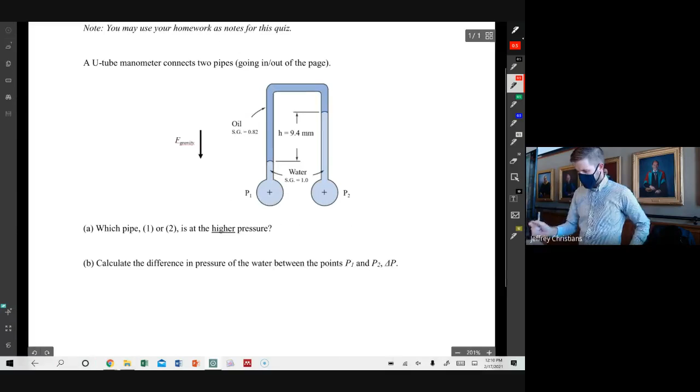Just to go over that briefly, how to think about this: remember you're choosing for part A, which is at higher pressure. I think this will help you think through the problem. It feels a little weird because the thing is upside down, but you can think about it the same way - like which is pushing harder, just visually? Well, it's the one that's winning, it's pushing its side higher than the other side. So the higher pressure is going to be at 2, because it's winning the battle, it must be pushing harder.

The difference in pressure - you're going to find a spot at the same elevation, so we'll call that A and A prime. Here, PA equals PA prime. You can't do that same thing down here, you have B prime and B, so PB is not equal to PB prime, and those don't equal each other because there's a different fluid in the middle. So it has to be the same elevation, but it has to be a continuous stretch of fluid. So that's maybe a thing to know.

So we need continuous fluid and same height, or same elevation.

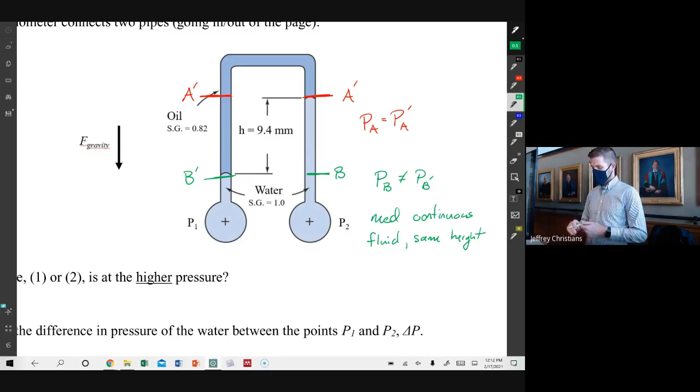And then what you're going to do is say, okay, if we look at the pressure at PA and the pressure at PA prime, you can write out an equation for exactly what that's going to be, and then set those two equations equal to each other and solve for the unknown.

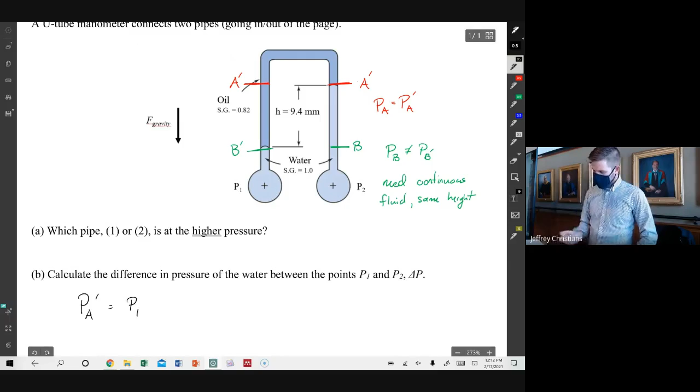So what you're going to have for PA prime, that equals P1. Then we're going up, we'll call this distance H2, we're going up a little bit from that. So we go minus rho water G H2, minus rho oil G H. So again, we're starting at A prime, and because we're going up in the fluid, it's going to be minus.

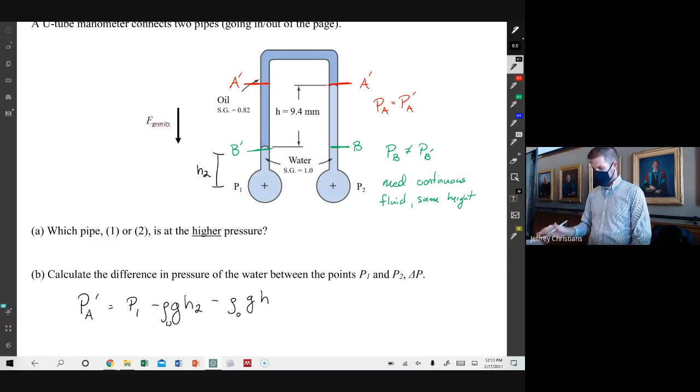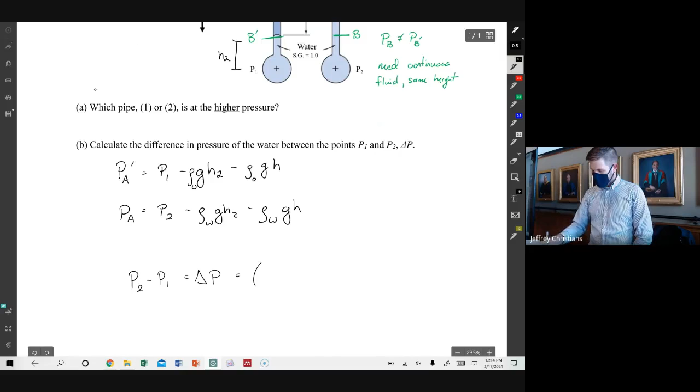We do the same thing: PA would be P2 minus rho water G H2 minus rho water G H. Then we would set those things equal to each other, cancel stuff out, and what we would get is P2 minus P1, or delta P, equals the difference in densities - rho water minus rho oil - times G H, because those two would cancel each other out. So you would just get that difference in densities.

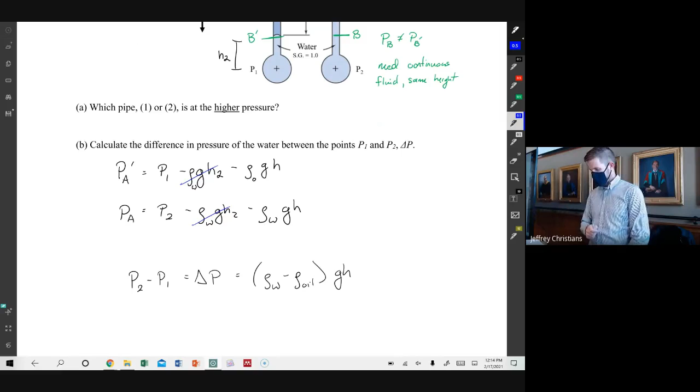And maybe that works again, if you think of the analogy of the scale. The P1 on the left is holding up the exact same thing as the right side, but it's holding up 9.4 millimeters of oil on the scale. And P2 on the right has 9.4 millimeters of water on the scale. Water is a little heavier than oil, so the extra pressure is how much heavier that water is than the oil.

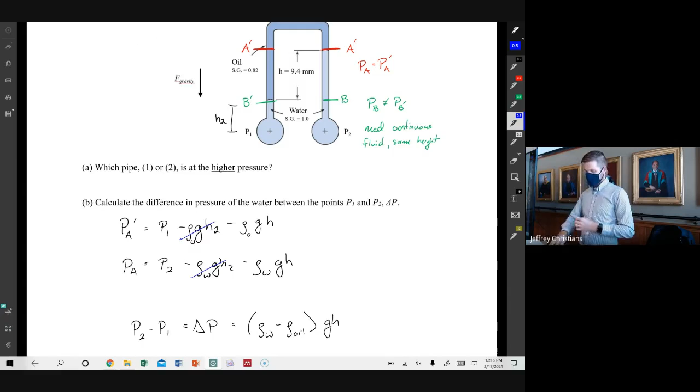So the answer was, it takes a little bit to get the units, but this was like 16, maybe 16.6 pascals, which is 16.6 newtons per meter squared.

Okay, so you first need to find the spots where you know the pressure is equal, and then say, on each of those scales, what's the actual weight sitting on those scales. Set those two equal together, and then actually go through and solve for your unknown. Especially when the geometry gets weird, don't skip steps and just jump to what the answer is going to be. It helps for you to think through it logically, step by step.

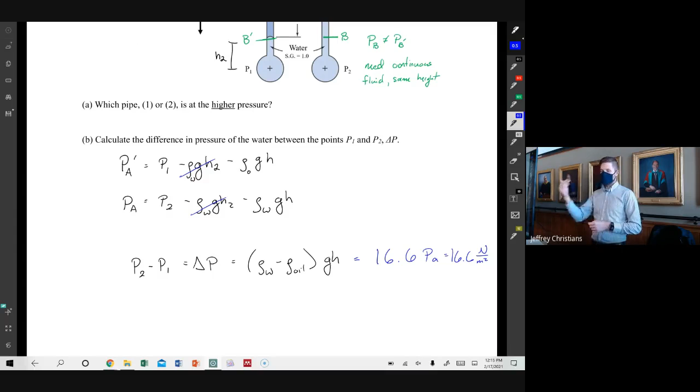Any questions on quiz?

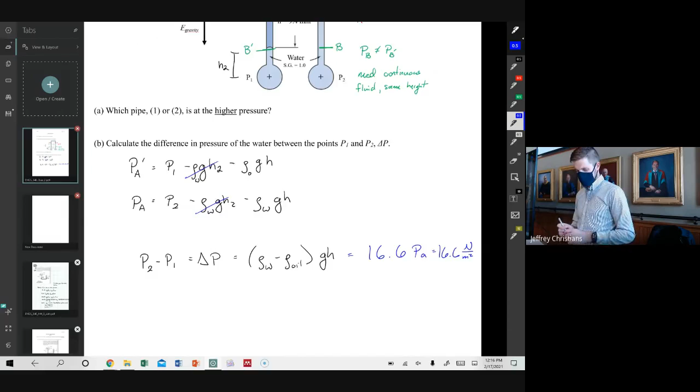Are there questions on the homework? I know that there are. So what questions are there on the homework? Yeah, Liz. For just in general for 3 and 4, I need some help with finding the resultant force. It's like the integral thing.

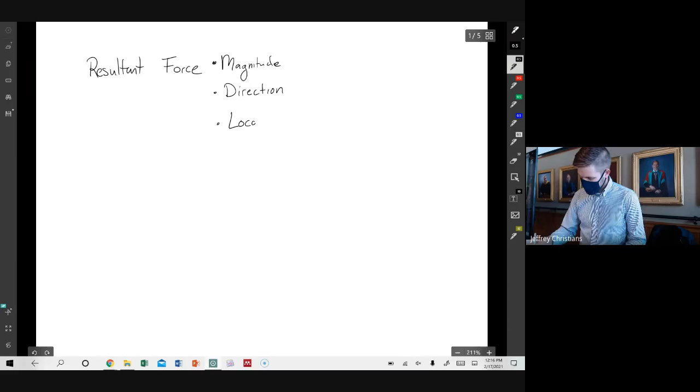Okay, so a resultant force, the equation that we have for resultant force—we have two parts, one is the magnitude. Three parts, I guess: magnitude, direction, and location. If you want to figure out what the resultant force is, you need these three things. Each of them has a separate strategy to get it.

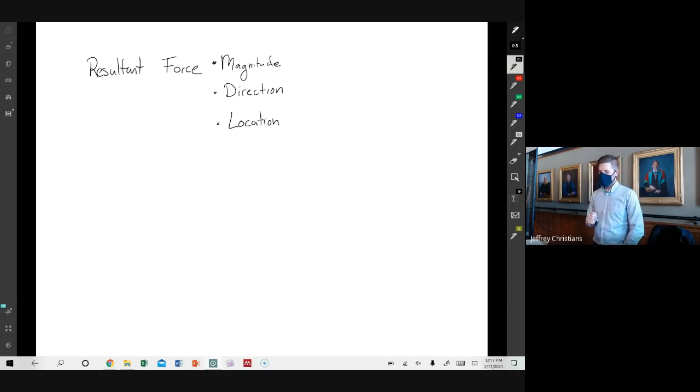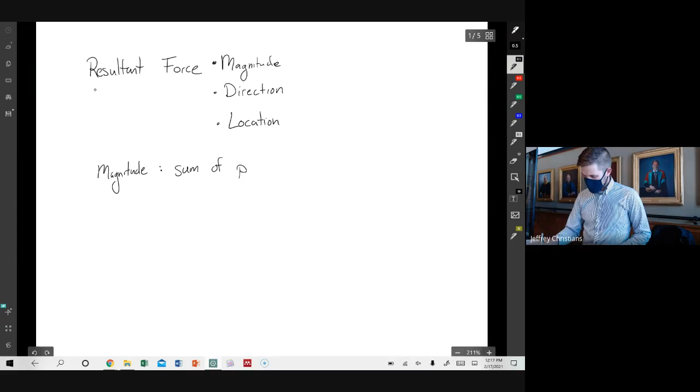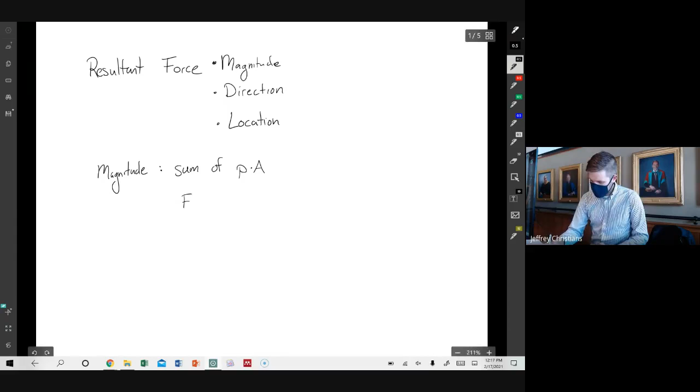The magnitude, right, that is the sum of the pressure times the area. That would be the magnitude. It's the pressure summed up over the area. So what does that look like? It would be something like this. And this is the integral you're talking about, right, Liz?

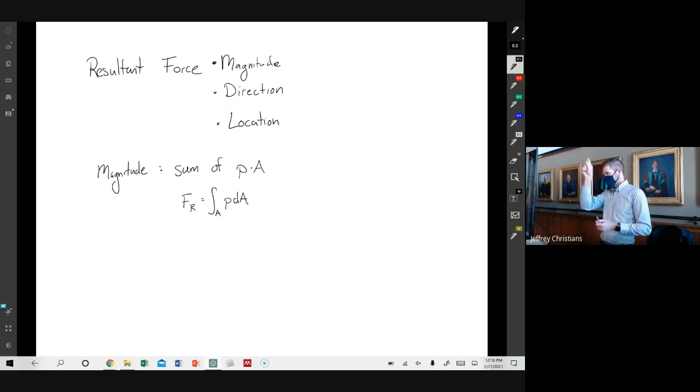Okay, so this would be the equation that we typically get. So what does that equation actually mean? It means that we're adding up the pressure times area over the whole surface. We never actually really do that integral because we don't need to. If you add up the pressure times area over every little snippet of the whole surface, another way of saying that: this equals the pressure at the centroid times the area.

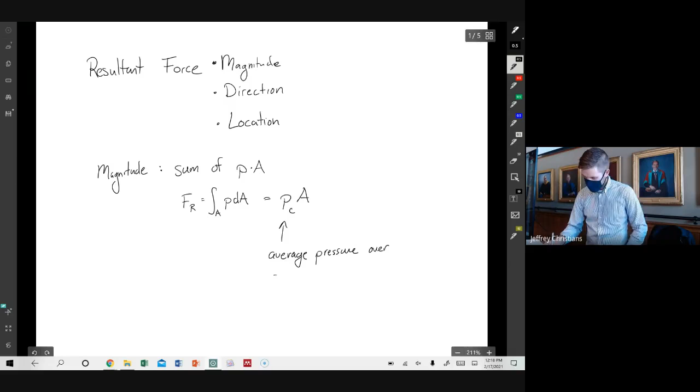So this pressure is the average pressure over our shape. Right, so the pressure—I'll draw a simple picture. If we had something like this wall...

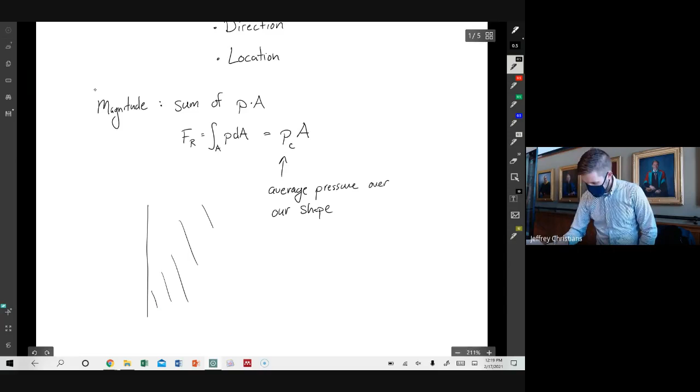We wanted to say, what is the average pressure over this wall? Well, at the top of the wall, the pressure is going to be atmospheric pressure, or zero gauge pressure. At the bottom of the wall, let me draw a vertical wall because that's easier to look at. Same idea. At the top of the wall, it's zero gauge pressure. At the bottom of the wall, pressure is going to be, if this is H, P equals rho G H.

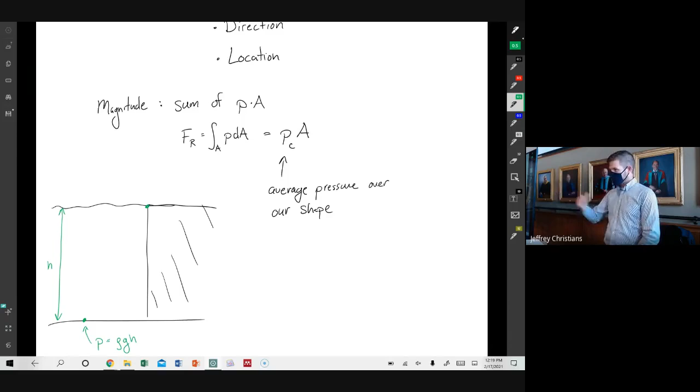And it's going to be increasing linearly between those two points as we go down. So the pressure is going to be pushing on the wall like this, where there's very little force on the top of the wall and a lot of force on the bottom of the wall.

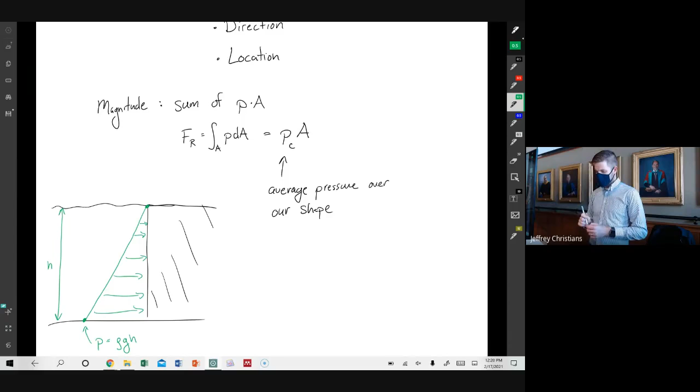If we wanted to, we could break this up into little snippets and basically add that up over the whole surface—a little bit at the top. But the other way to do that is to say, okay, this is a triangle. So what is the area of that triangle? It's 1/2 base times height, or it's the same as the area of this square, which is the pressure at the centroid, PC. So the overall magnitude of those two pressure distributions would be identical.

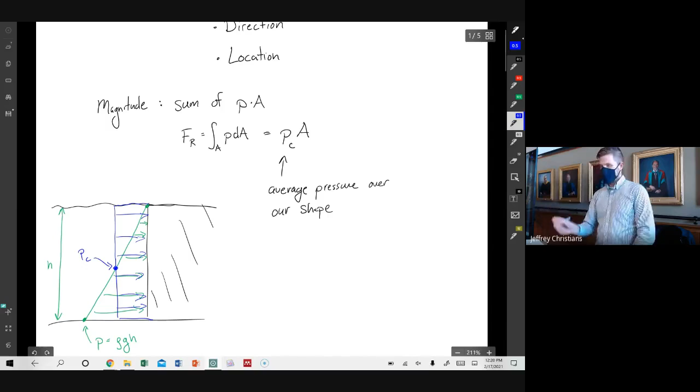Does that sort of clarify? So basically, the simple way—you're never gonna... so don't use this.

Use that. We're never going to actually need to do the integral because it's just the average pressure, which we can find as long as we know the pressure at the middle of the object. So that's how we're going to find the magnitude, right? That's magnitude.

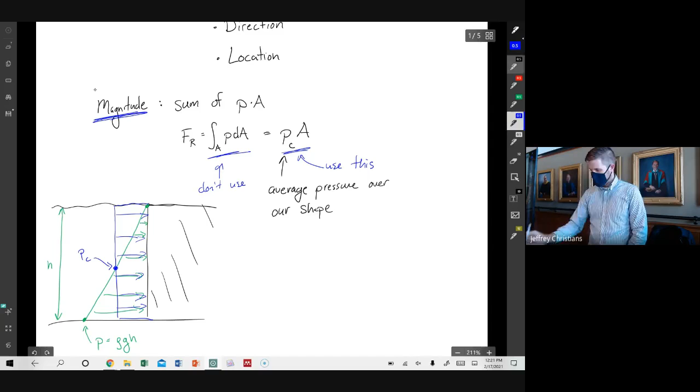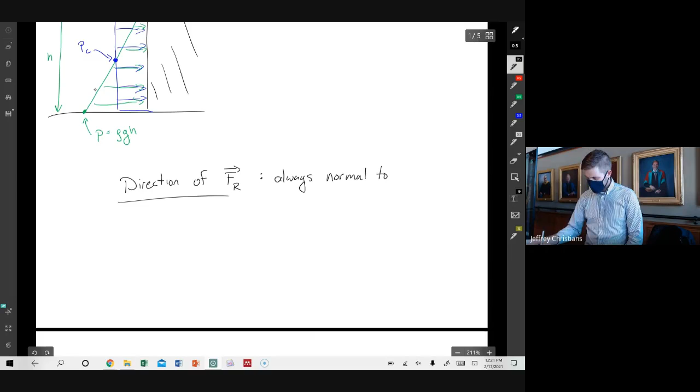The second part that we need to find is the direction. The direction is always normal, pushing in on the area, on whatever object it is. So it's always pushing in, whatever the shape is. You can just look at the shape and it's pushing in on that.

And then the location of FR. There's a couple checks that you can do. The number one check: it's never going to be in the middle, it's never going to be toward the top. So it's always below the middle, but it's not going to be at the bottom either. So it's always going to be somewhere between the middle and the bottom of the shape. So this is always below the centroid, but not to the bottom.

Depending on the geometry, maybe it's kind of close to halfway, maybe it's more close to the center, but it's always going to be between the center and the bottom, a little bit below the center, again depending on geometry. That's when you're doing your calculation, that should help you place if you're in the right ballpark or not.

And then the equation, our book has a couple simplifications of this equation. I prefer to use this one, so it's rho g sine theta over FR. You can do some simplification because the resultant force is going to have rho and g, and it's going to have some of those things in them, so you can simplify and cancel out on the top and bottom of that fraction.

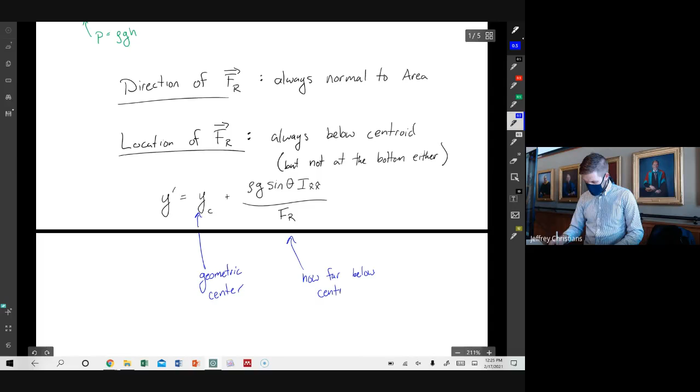This guy is the geometric center, or the centroid, and this is how far below the centroid. So again, you have to, especially when you start tilting your axes, keep track of exactly what are the angles and where this is on the shape. But yeah, I think I agree, that's a helpful way to think about it.

Okay, are there any specific questions on either 3 or 4, or one of the other ones? Yeah, John? For number 3, I was having trouble finding where the length of the channel comes into play.

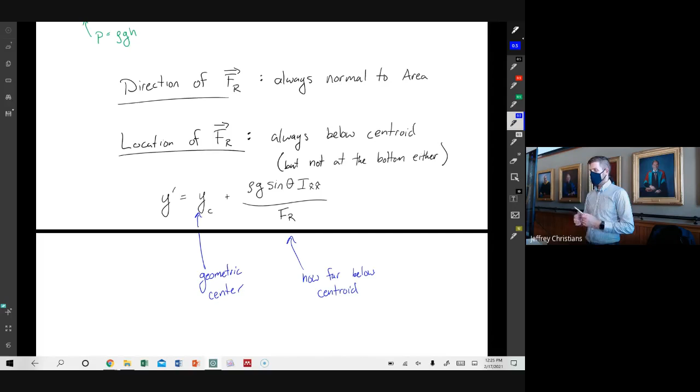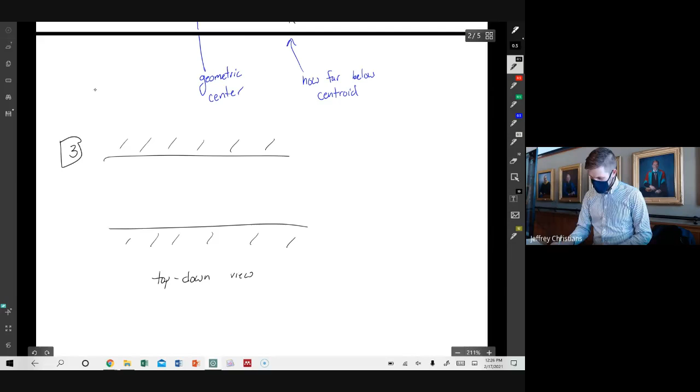Okay, so for number 3, you have a situation like this. This is the top-down view. You would have something like, there's one gate, there's your other gate. This is 34 meters—I'm kind of making this up. Let me pull up my pictures so that I'm not totally making it up.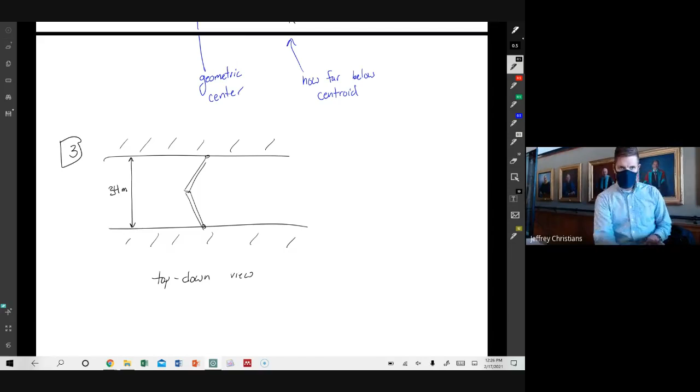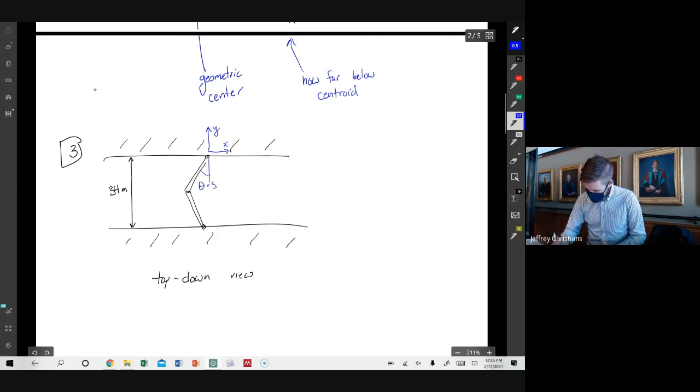Yeah, that's right, so that's 34 meters, and the book gives you those axes—do they point X that way? So that's Y, and that's X in their picture. They say that angle is theta, 15 degrees.

Because your gate is angled in the channel, this distance here, the width of the gate, is going to be longer than 17 meters because it's tilted a little bit. So you end up having to use some geometry to figure out how long the gate is. It's going to be between 17 and 18 meters, a little bit longer.

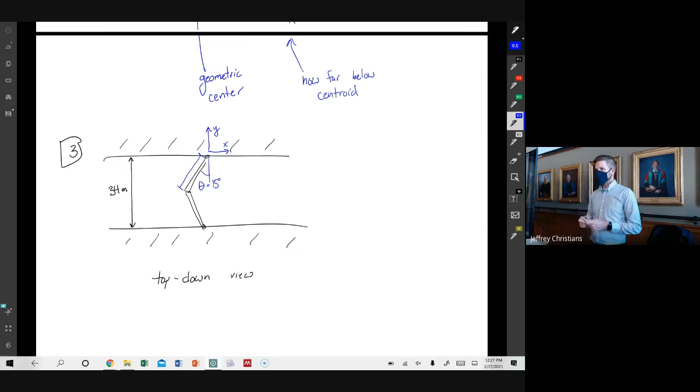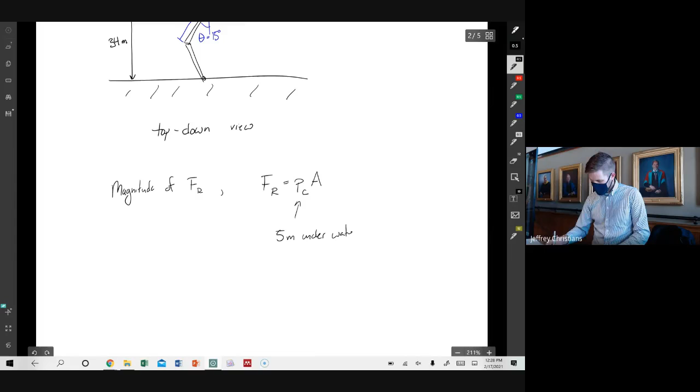So this is going to be like 5 meters underwater. Right, that's where the center of the object is going to be. And this is the surface area of the gate. So that's like, is it 17.6 meters times 10 meters?

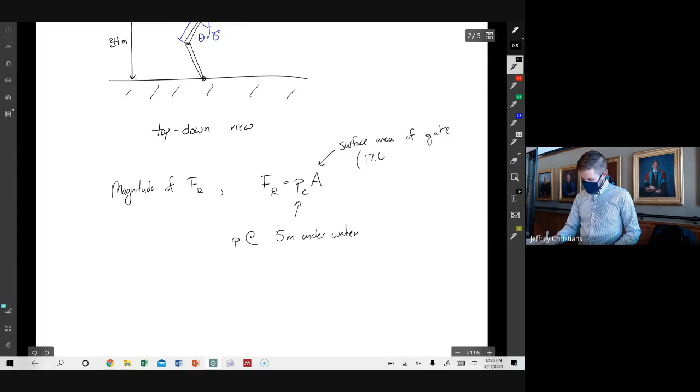I think that's right. So you're going to find the magnitude. It's going to be acting below 5 meters by a little bit. So you should expect something between like maybe 5.5 and 7, something like that. Below the center, but not at the bottom.

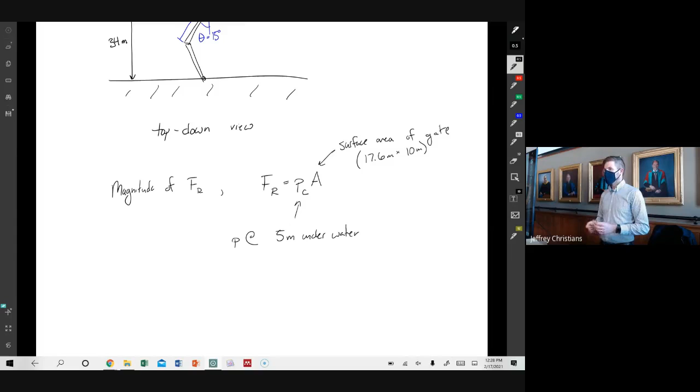And then the last part is the direction. So when I solved this, I made a new set of axes that were in line with the gate. So I made axes like this because that made my life easier.

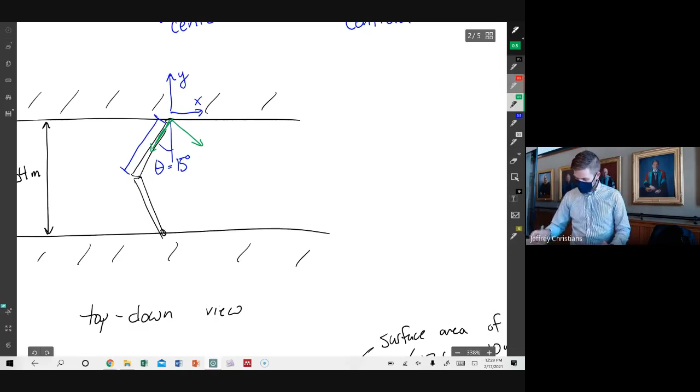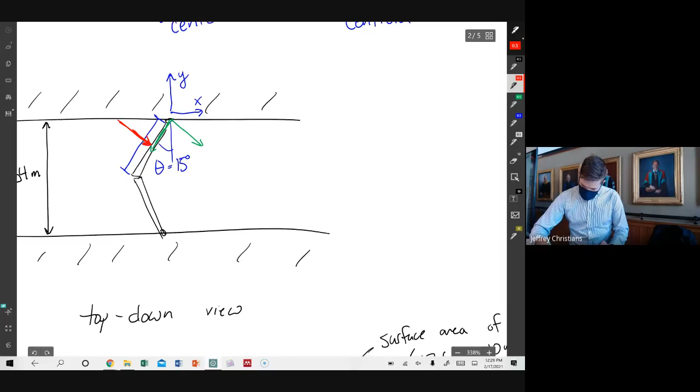And then you figure out a resultant force that looks, right, your resultant force is going to be pushing in on the gate. I can make that in red. Your resultant force is going to be pushing in on the gate, FR. It's going to be centered left and right, but below center, it's going to be deeper than the center. But it's going to be pushing at that angle.

So then the last step in this problem is to do some geometry. And basically what you're trying to do is split this up and say what component is pushing that way and what's the component of the force that's pushing that way. So you would get the actual force that's pushing against the gate versus the force that's pushing the gate into the other gate. So that's the significance of their axes.

But some of it is just to figure out what we're trying to do in this is to figure out the magnitude and location so that then we could do a statics type analysis on the system and figure out where the moments are and do some of that stuff. We're not doing all that part. We're just finding where's the force, how big is it, where is it acting, what direction.

So you're going to end up with something like you have to do the geometry to split your resultant force into those components.

If you have a follow-up question, I'm happy to answer it too. Yeah, John? So just to be clear, did we not need the length of the channel, or? You needed the length of the channel to find the size of the gate. After that, it's gone.

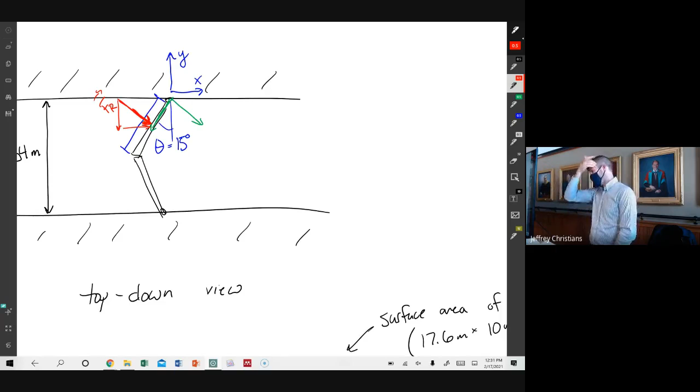Oh, the length of, so... Oh, no, that doesn't matter. Right, because it's the same force whether you're holding back a channel that's 1 meter wide or if it's the whole ocean, right? So pressure only matters with depth. So it doesn't matter how much water there is sitting on the other side. It's just about depth.

It's just so for this, it would be 1/12 width length squared... cubed. Can't read my own writing. Cubed.

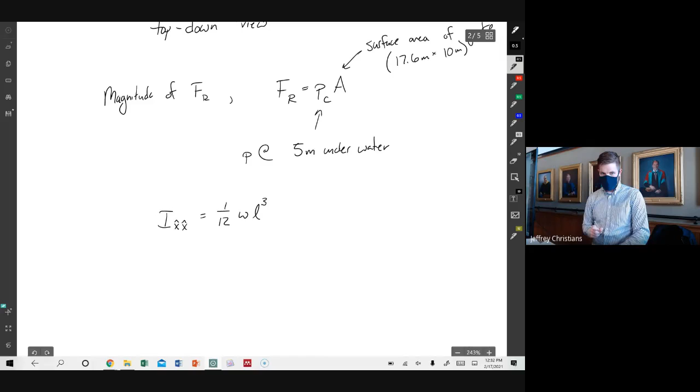So then you have to look at, okay, what's the depth, like which is the width? Is it 10 meters or is it 17.6? So this would be, so the width would be 17.6 meters. The length would be 10 meters. There is a chart that I have on Moodle that, let me pull it up so that you can see it.

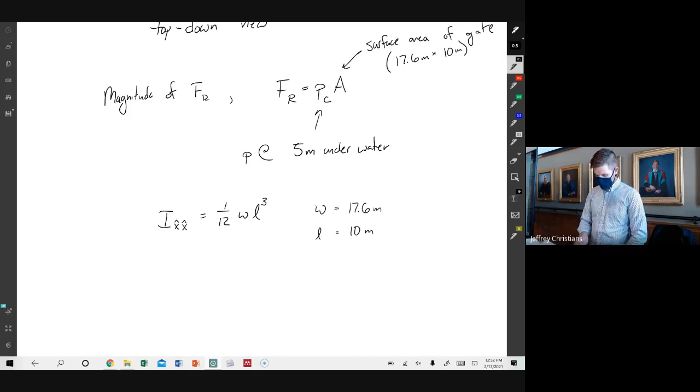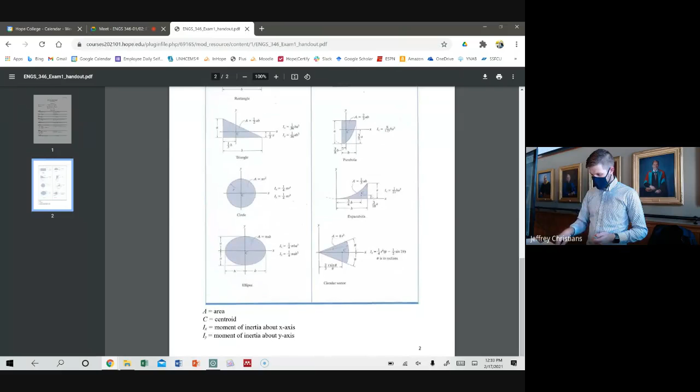That has all equations for normal shapes. It's just the area, yeah, it's the geometry, it doesn't matter what the mass is. So it's going to be this document on Moodle. It's exam 1 handout, has the geometric properties of areas.

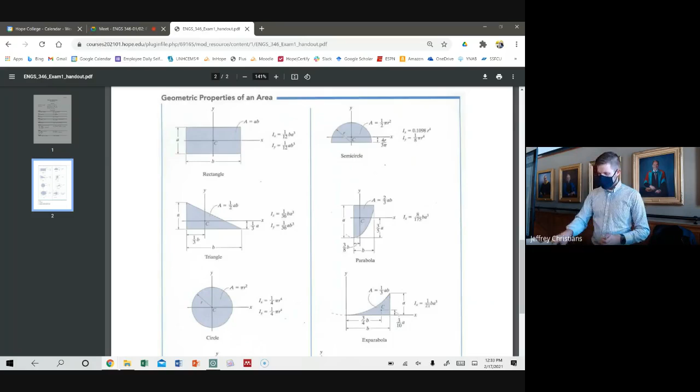So it gives you things like this. So we would be, oh, we have a rectangular gate. We're going to use something like that. And this tells you, okay, how would you find the centroid? Like if it's a triangle, this is where the centroid would be. This is what the moment would be. So this has just kind of a handy reference for these types of problems. You'll be given this for the exam.

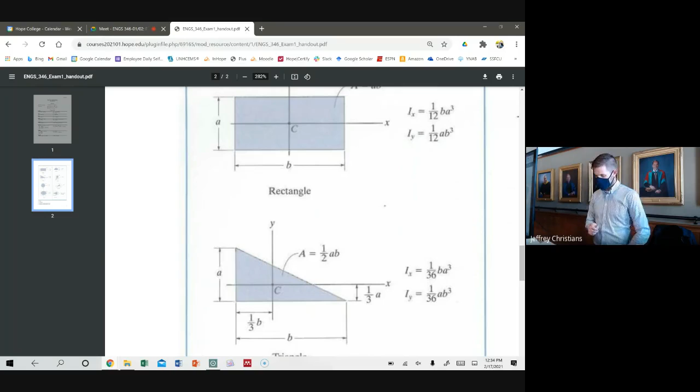Yeah, Theo. About the moment of inertia, would that be I sub x? So the one weirdness about this, what it calls IX, right? That's the second moment about the x-axis, which is what we have called IX hat, X hat. So there's a little bit of a disconnect in the terminology from this sheet to our terminology. But, the note.

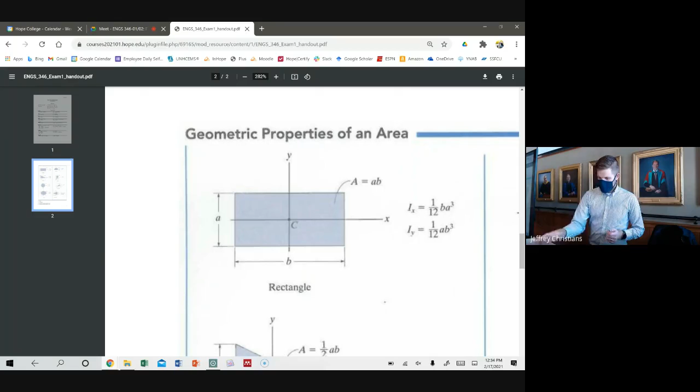Because you're in the X, Y, and rotating about the Z, you would be rotating. It depends on how you're going to be rotating about this axis. You're pushing below the center, so that's going to cause it to rotate about that axis. But it can get a little tricky.

So the hinge, you're going to be rotating about the hinge due to the resultant force. But the pressure distribution is going to cause a moment that's pushing harder at the bottom than at the top, so it's pushing at that bottom of the gate. That's where you're rotating around that center horizontal axis, not the vertical axis. There is another moment about the vertical axis, which the problem as written asks you to find, about the hinge. But that is more statics than I know, so I told you not to do that because I can't do it either.

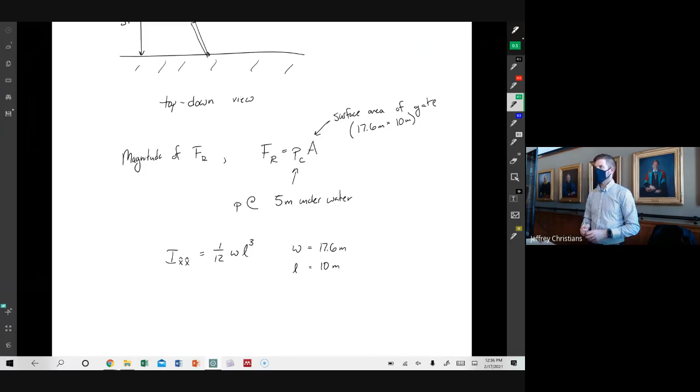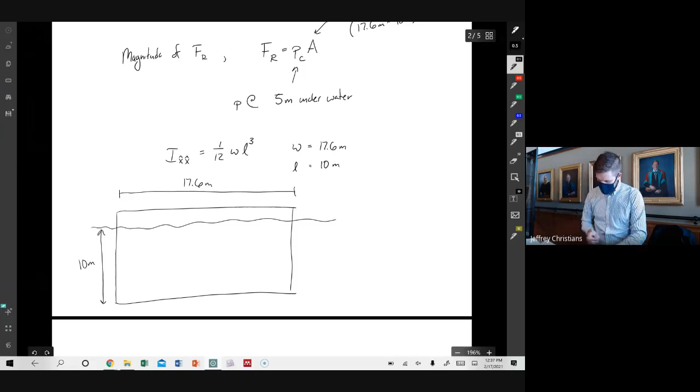So if you look at, here's your gate - this is 17.6 meters. There's water here, this distance here is 10 meters. You're looking for the pressure PC equals rho G HC, where you're looking for the depth that center is. So this is going to be 1,000 kilograms per meter cubed, 9.81, and then 5 meters. That would be the pressure in gauge pressure.

Because right here at the surface, so it depends on how you define your axis. Our pressure here at the surface is 0 gauge pressure. You could imagine, for some problems, especially the second one, defining your 0 point underwater. So the pressure at the origin of your axes could be underwater, or it could be something like a pressurized vessel, where the pressure at the surface of the water is not 0, so you might have to take that into account. But it's whatever the pressure is at the center.

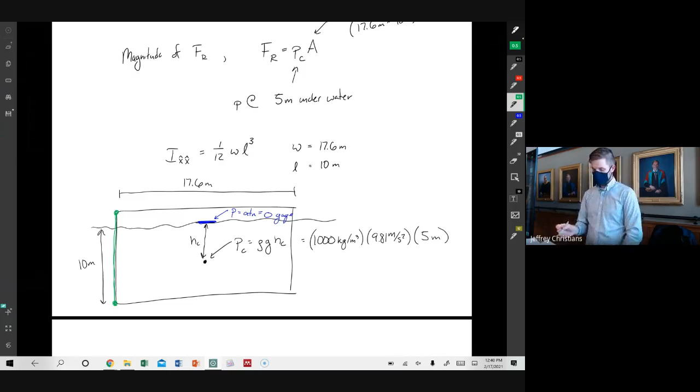Okay. All right, so hopefully this helps as you wrap up, or at least confirms that you knew what you were doing, or that you don't quite know what you're doing yet and need to work on that. But either way is still good.

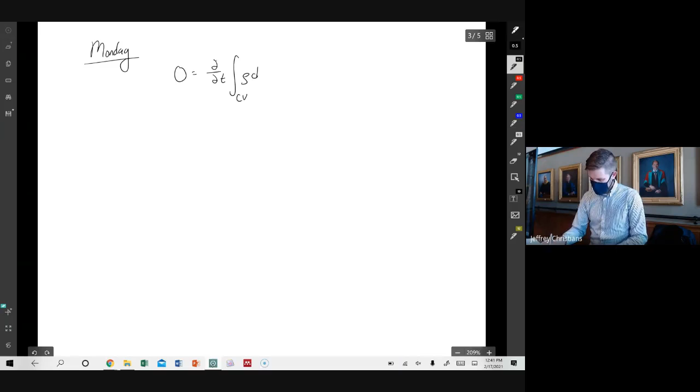So last time in class on Monday, we looked at and kind of derived this equation. So I just want to spend a few minutes here saying, how does this actually relate to the problem that we did, that you guys worked on in the in-class assignment where we had stuff flowing into this kind of funky elbow thing, and we had velocities coming out.

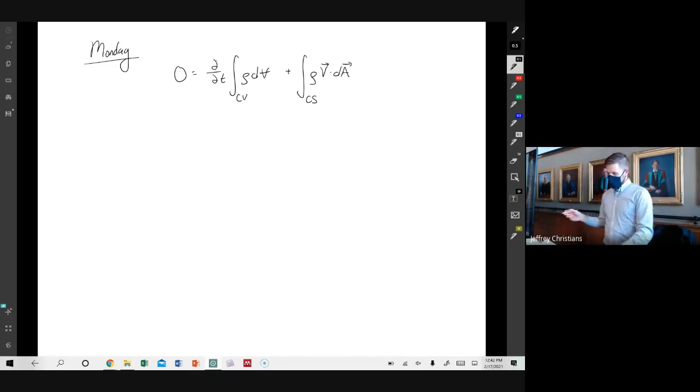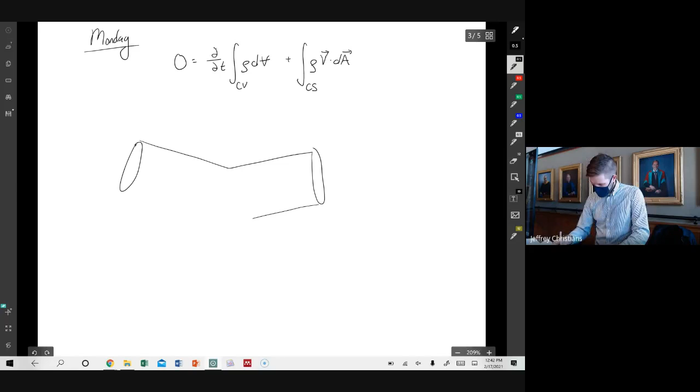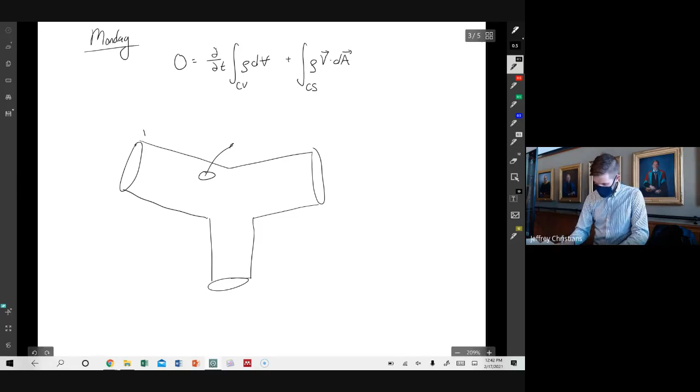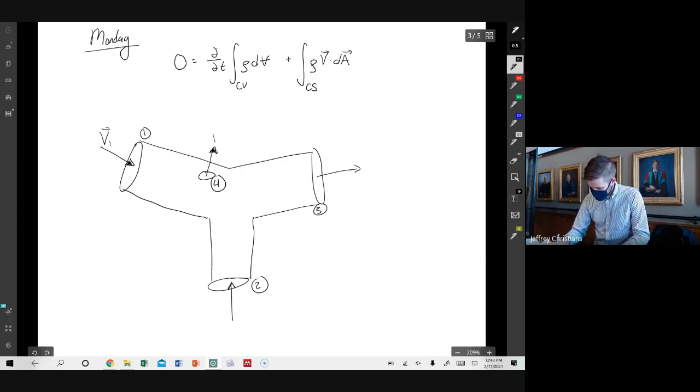So if we had, I'll just kind of draw it here so we can remember. It was something like this, and then we had another thing where we had a hole there. I think we called this 1, this 2, 3, and 4, something kind of like that. So if we have flow in - I think it actually turned out we had flow in there, flow out there, and flow out there. So if this is V1, V4, V3, V2.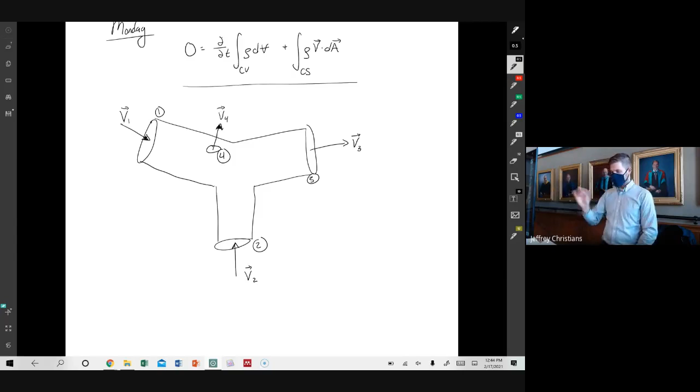What we're trying to do with this top equation, the Reynolds transport theorem, is be as detailed and inclusive as we can with every possible situation. But the challenge then is to get from that to the simplified version we can actually use to solve problems, and sometimes that's not always straightforward. So for this top equation, I'll just rewrite it down here so that we can work with it.

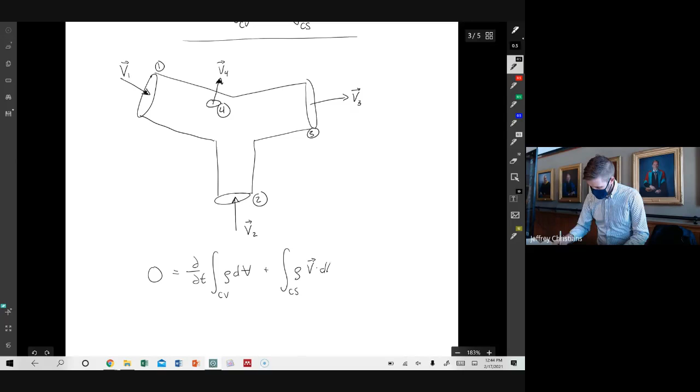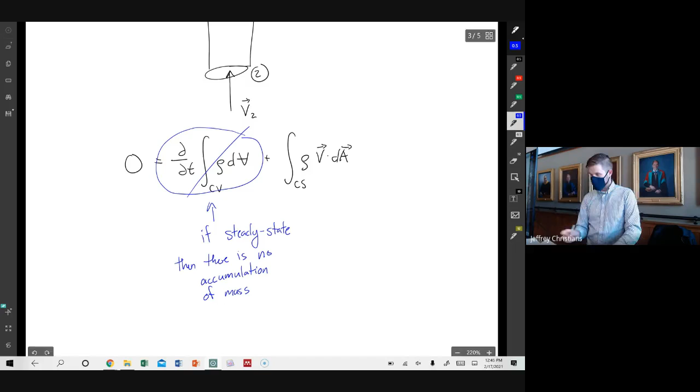Rho dv. Okay. If it's steady state, then there's no accumulation of mass inside of our system, so this part goes to zero. That's the accumulation of mass, right? Whether inside this, is mass changing with time inside of our control volume.

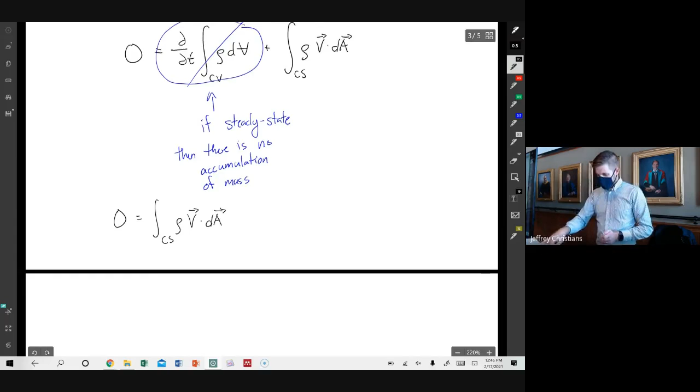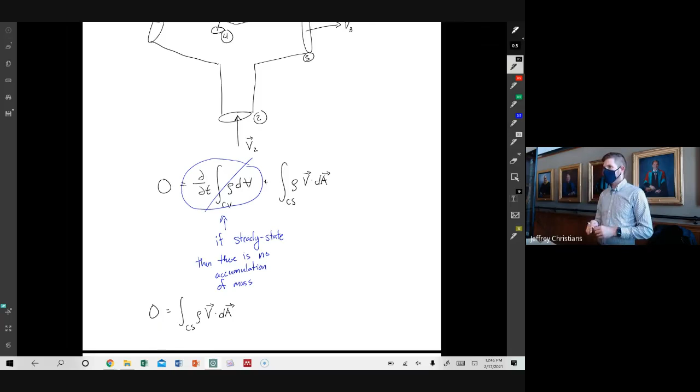So we get the simplified equation: 0 equals the integral over our control surfaces of rho V dot dA. And then we have to look at our problem and say, where are the control surfaces? Where are the surfaces that we need to care about? So then we need to look at surfaces where we have a flow in or out.

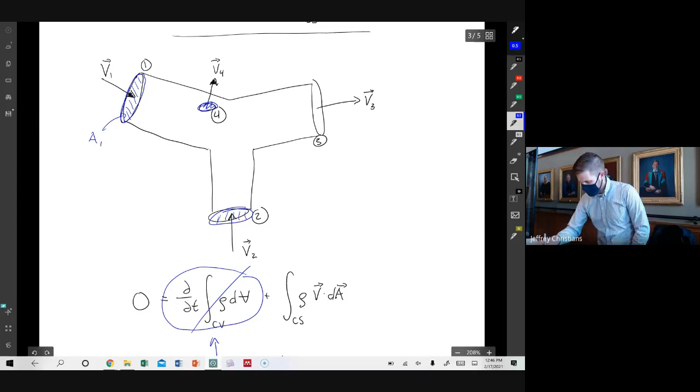Okay, so in this case here, we really have four of them, right? This would be one surface, the A1, this would be a second surface, a third, and a fourth. So those are really our four separate control surfaces that we actually need to look at.

Yikes. So what these are, this would be, say, A1, that control surface. But we need to look at the surface as a vector, right? So this would be the vector notation version of that, A1 vector. It's always an outward pointing normal, right? Outward, an outward normal.

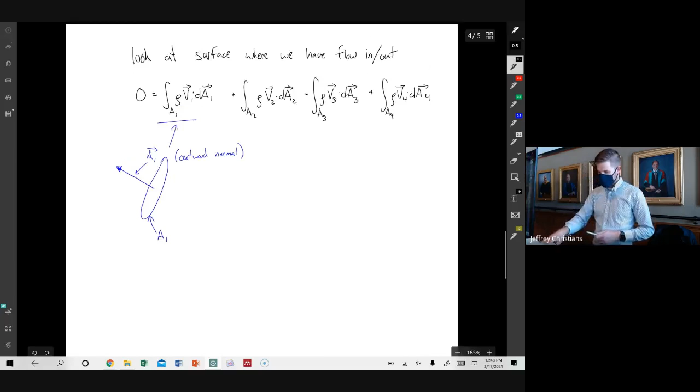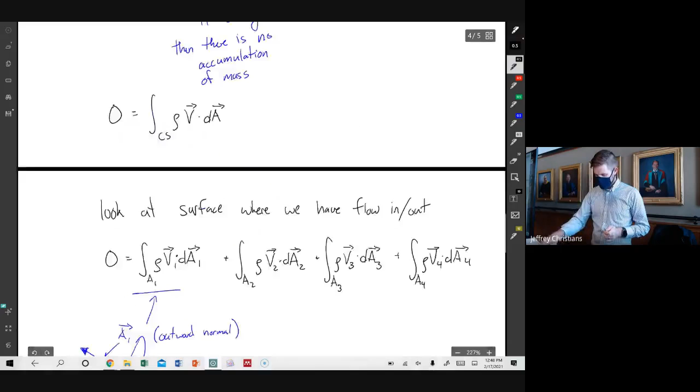What we're going to do then is say, okay, what is the velocity? So if we look at the velocity coming into that surface, V1. So the velocity here is there. So if we wanted to do the integral over A1 of rho V1 dot dA1...

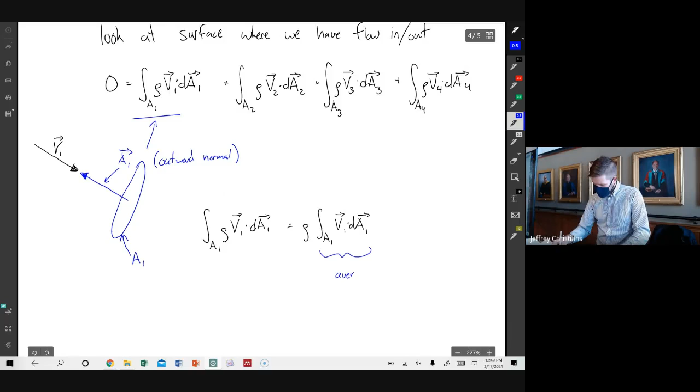We can first take the density out as long as the density is not changing anywhere. So this is density times V1 dA1. And then you have to ask yourself, is this integral the average velocity times the area? But it's like the dot product of those two.

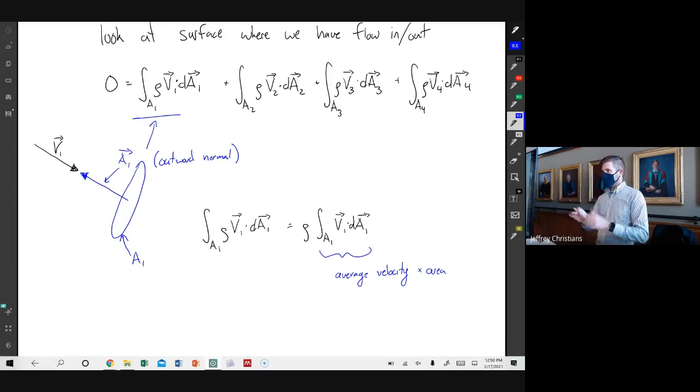For average, the average velocity vector dotted with the area vector. So again, if you're summing up the velocity over the entire area, that's just like we did with pressure, just the average velocity over that area. So the dot product is where we actually come into getting negatives and positives. So the dot product is what gives us our sign. If V1 and A1 are pointing in different directions, that gives us a negative in front. If V and A are pointing in parallel directions, that gives us a positive. So the dot product lets us basically flip the signs for us so that we don't make sign errors.

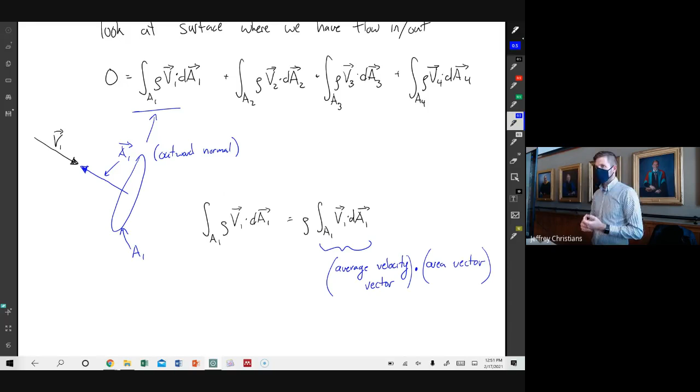It's also going to allow us to do things with non-uniform velocity profiles. If we have a different shaped velocity profile, we can handle that by actually running through the integral. So we'll pick that up after the exam. But hopefully you see at least a little bit where the basic equations we came to come from.